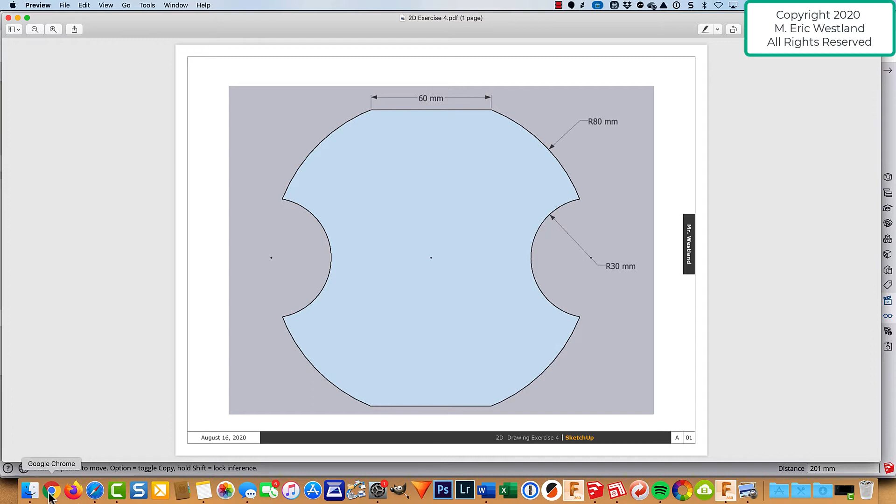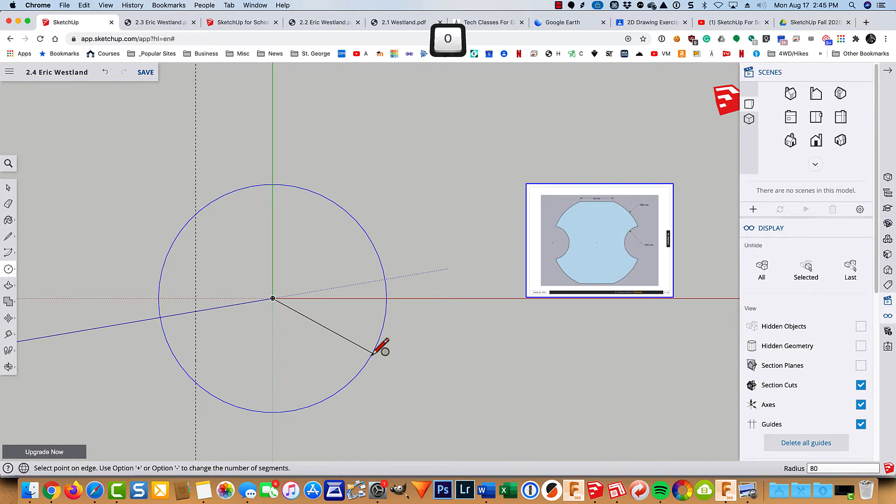Let's go ahead and get started. I'm going to begin by putting the circle on the origin here. It remembered from last time that I have 50 sides, which is nice, so I don't need to change that every time. I'm going to type in 80 and hit enter, then type M for the move tool, click on this, and just put it right over there.

Shift Z gives me a zoom extents, and I'll close this. So now to make this part over here, where if this circle was extended like it is over here, we have our mark right there.

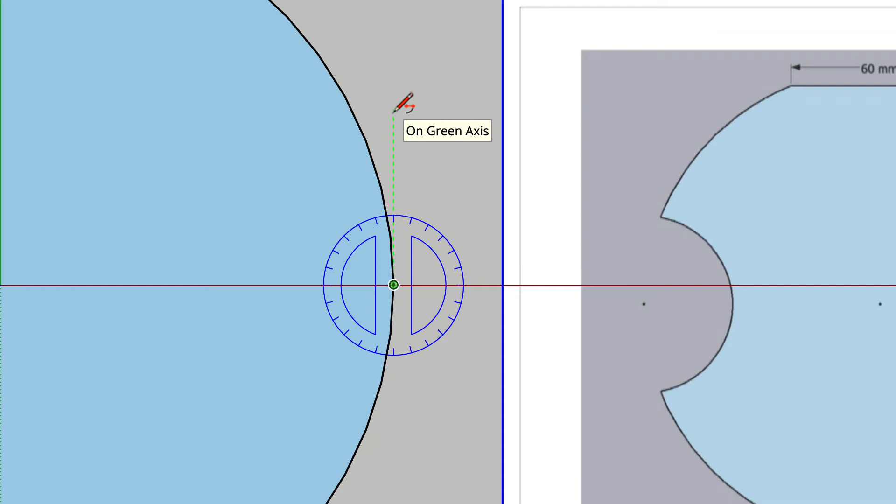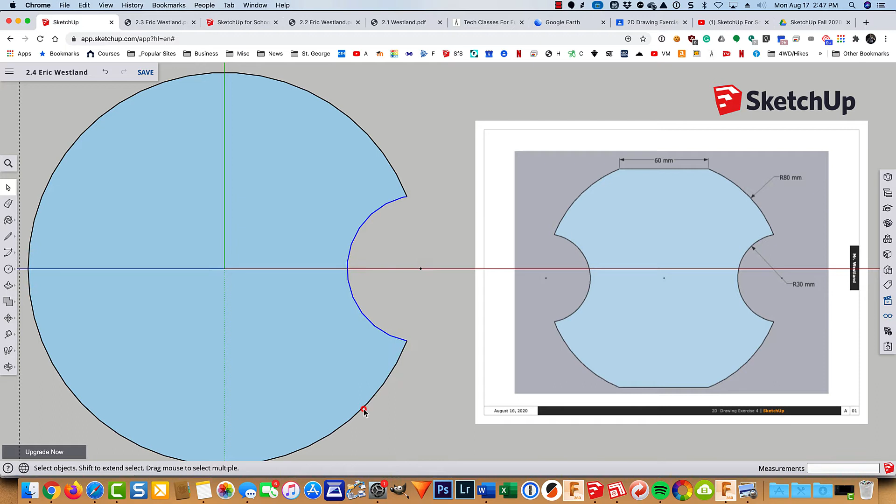Let's start an arc of this type, and I'll come up along the green axis 30, so I'll type in 30, same as clicking right there. Then I sweep around to right there. I can erase that segment out there and that segment, then come into this arc, right click, find the center, and do the same thing over here.

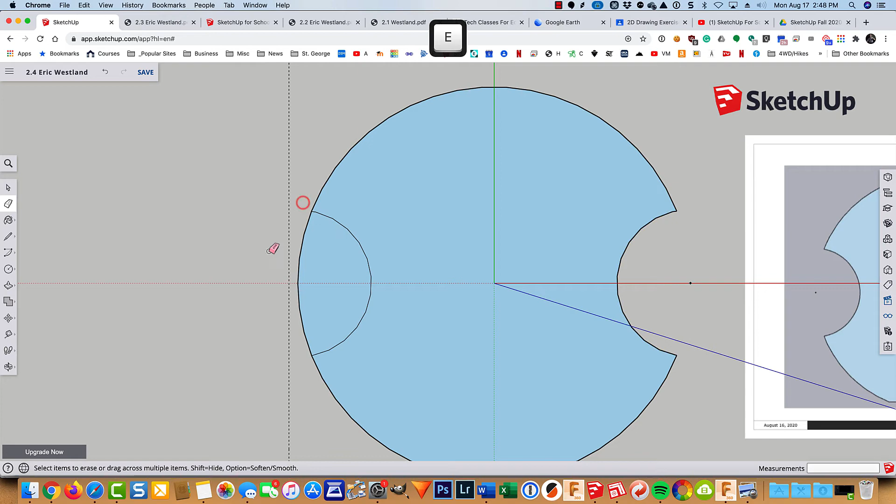Restart an arc, put it right there, come up along the green axis 30, and then sweep up. I want to sweep the other way. There we go, till I get to that end point. Erase that segment, and that segment.

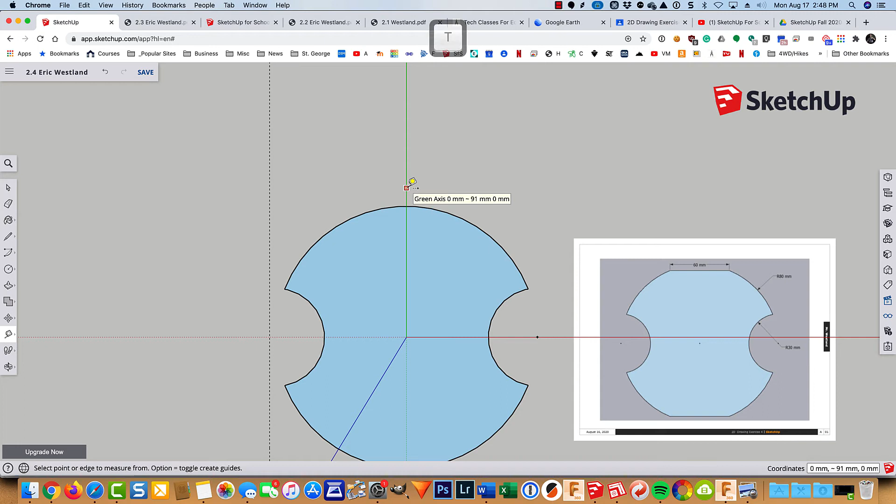So now how do we find this right here, this 60? Well, it's centered over this vertex or center mark right here. So I'm going to type T for tape measure, pause on the green axis, hold down my left mouse button and pull across and type in 30, which is half the distance, then do the same going over here, 30, and put that in.

So now I can come up here - we have polygons, don't we? You can see the straight edges here, but I should be able to draw a line going from this intersection across to this intersection, and it's parallel with the red axis.

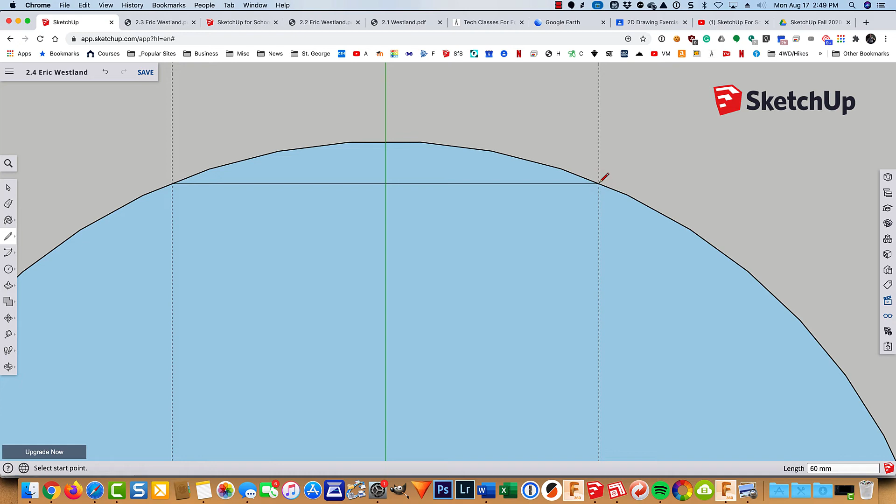I'll go ahead and erase it, and while I'm in here, I'm going to dimension it just to check my work. Pull up, and it says 60. So that's a good sign.

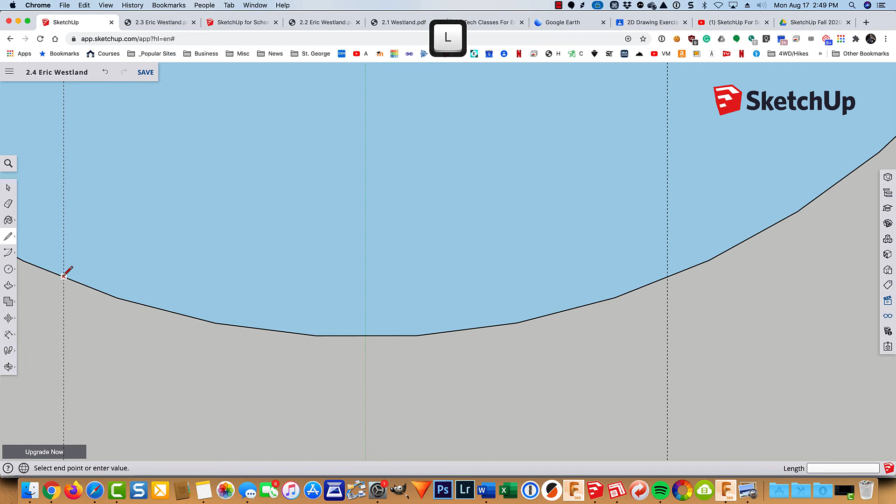So then we'll come down here and try to do the same thing. It looks like we're in good shape. So L for line, from that intersection to this intersection, E for erase. Erase that. Go back to our dimension tool. There we go, click on the line and pull that down 60.

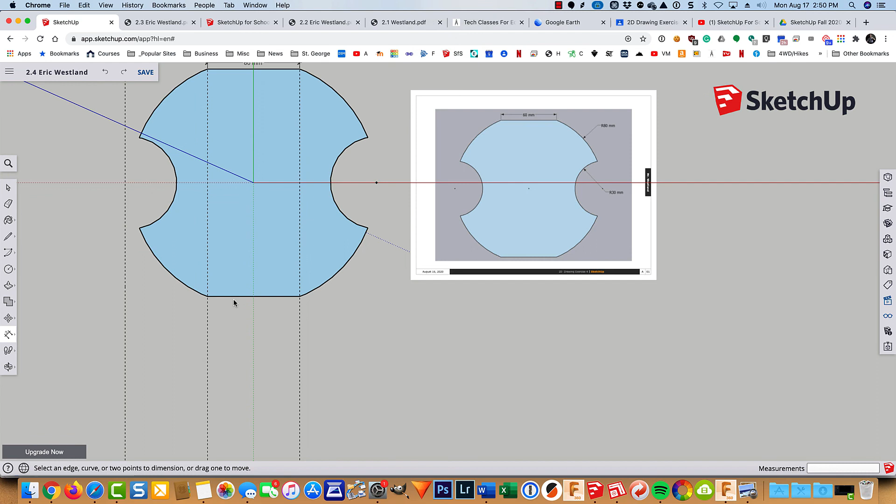Although we don't really need that dimension, so I'm going to undo that. The reason we don't need it, the reason it doesn't exist over here on that drawing, is that we already have it up here. And if it looks the same down here, if it was 59, I'd need to add a dimension. But if it looks the same, it's implied that those two line segments are the same.

So then finally I'm going to come in here and find the center, and add another dimension, this time that goes through the tick mark or center mark, and then finally one more dimension maybe right there. So we've got 3 dimensions over here, we've got 3 dimensions there.

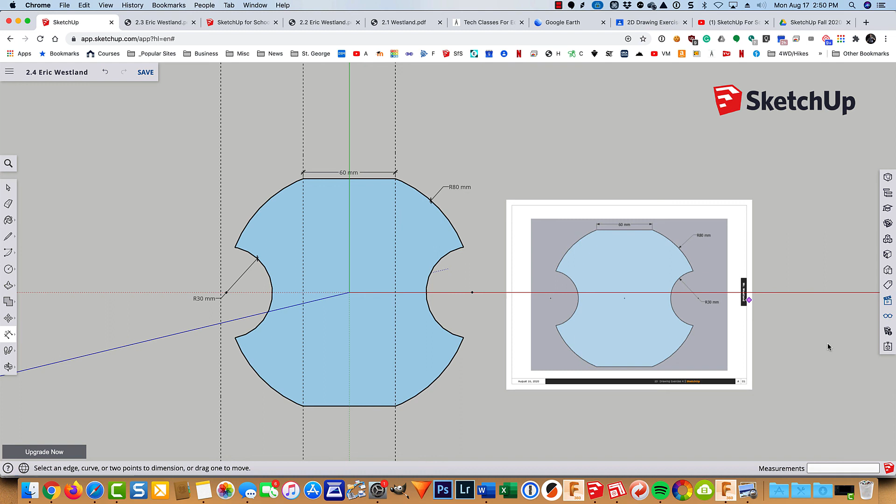So we are ready to print. I'm going to turn off guides, click on this and hide it, and make sure that your work is saved. Then come in and file and print and hand in 2.4 just like you did the other assignments.